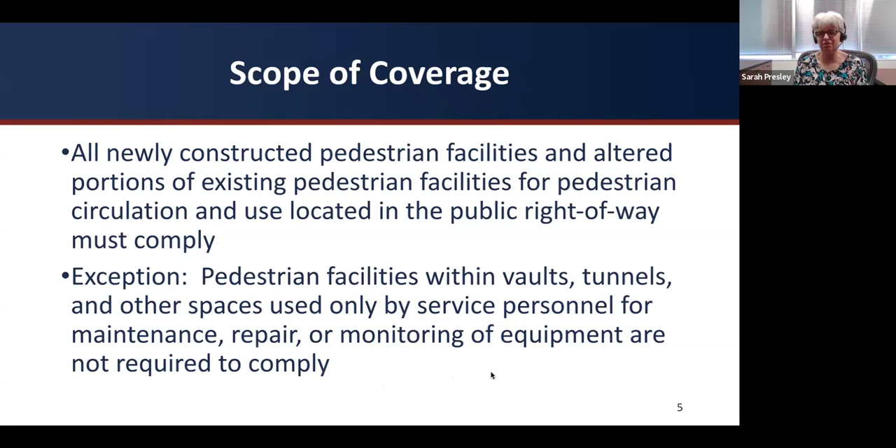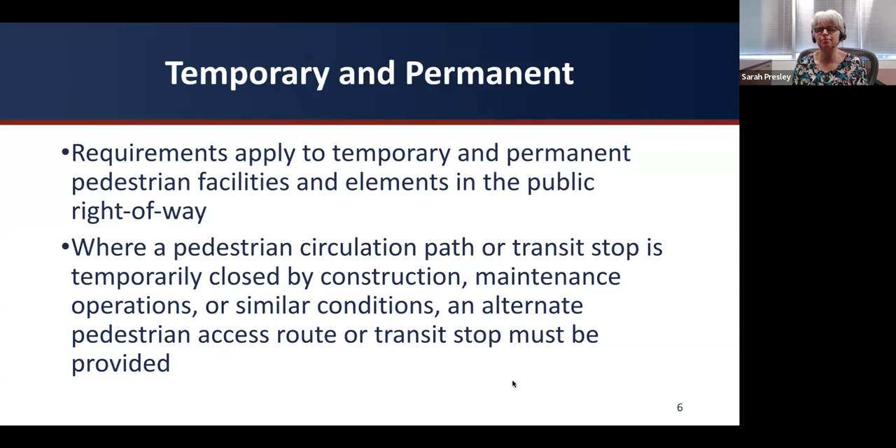Next slide. Now, these requirements do apply to permanent and temporary pedestrian facilities and elements in the public right-of-way. Some examples of coverage for temporary facilities include that where a pedestrian circulation path or a transit stop is temporarily closed by construction, maintenance operations, or similar conditions, an alternate pedestrian access route or an alternate transit stop must be provided. So those are temporary facilities, and we do have requirements in PROWAG. They're more limited requirements, but this just goes to show that we do cover temporary and permanent facilities with these guidelines. Next slide.

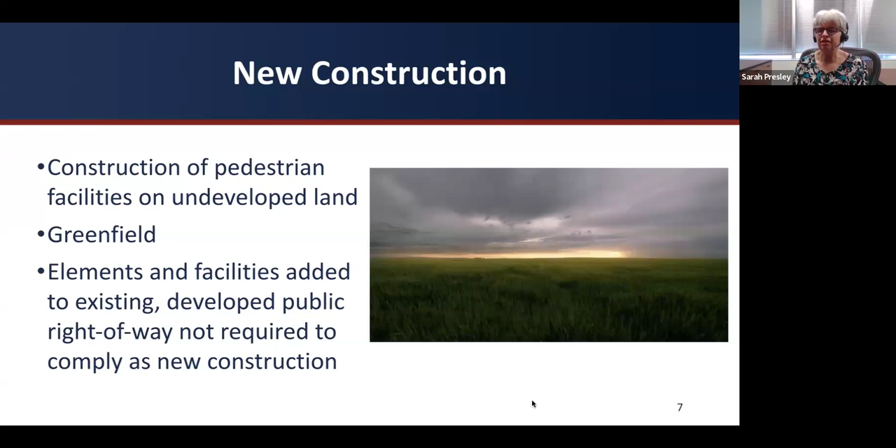And now let's talk about new construction versus alteration. So I mentioned that newly constructed and altered portions of pedestrian facilities and elements have to comply with these. So new construction is construction of pedestrian facilities on undeveloped land. It's basically what they call greenfield. So new construction is really, if you go out into a green field somewhere and there's no pedestrian facilities and you start building them, that is what's considered new construction. So elements and facilities that are added to existing developed public right-of-way are not required to comply as new construction. Next slide. On to alterations.

So first, I'll start with a couple of relevant definitions. So alteration or altered is a change to or an addition of a pedestrian facility in an existing developed public right-of-way that affects or could affect pedestrian access, circulation, or usability.

And since we talked about a developed right-of-way, we have a definition for developed. Something that's developed is something that's containing buildings, pedestrian facilities, roadways, utilities, or elements, basically things that are already existing. It's considered to be developed already, and we're talking about alterations as opposed to new construction. Next slide.

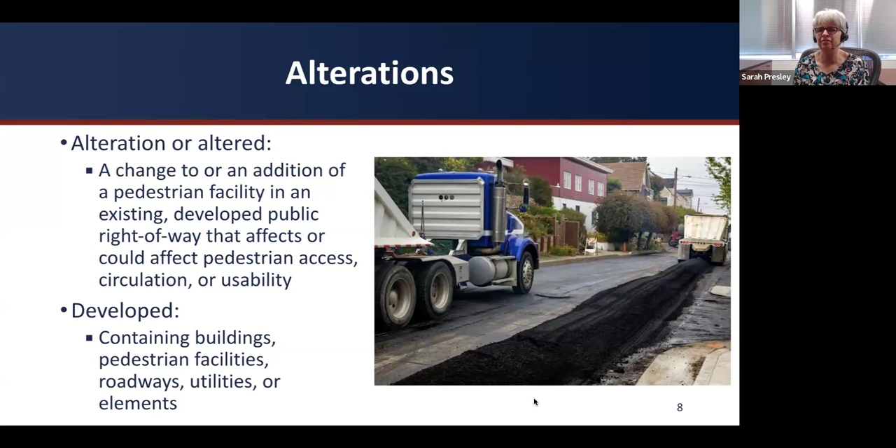Now we're going to talk about existing physical constraints. So in alterations where existing physical constraints make compliance with applicable requirements technically infeasible, compliance is required to the maximum extent feasible. So basically, with alterations, since you have things that are existing already, you may not be able to comply with the requirements fully, but you have to comply as much as possible to the maximum extent that is feasible.

And one reason you might not be able to comply fully is because you have some of these existing physical constraints. And existing physical constraints can include, but are not limited to, underlying terrain, underground structures, adjacent developed facilities, drainage, or the presence of a significant natural or historic feature. So these are all reasons why there might be an issue with complying fully with the requirements when you're altering a portion of the public right-of-way.

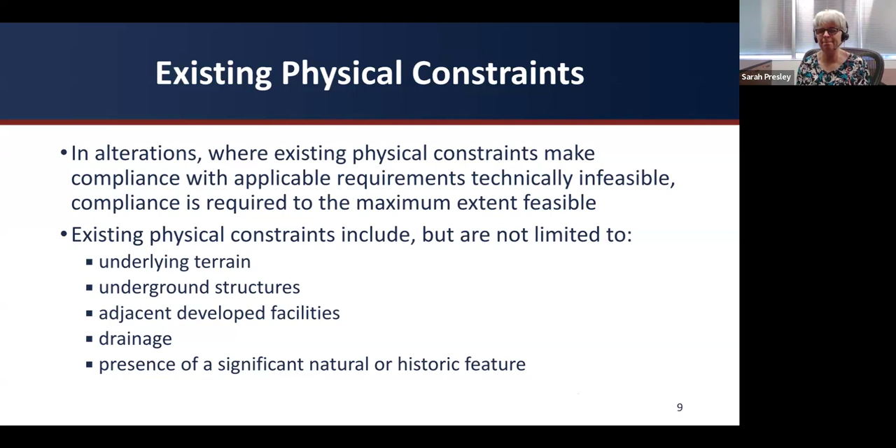Next slide. Now let's talk about alterations in connection to a pedestrian circulation path. So where pedestrian facilities are altered, they must be connected by a pedestrian access route to an existing pedestrian circulation path, and a transitional segment may be used in this connection. And of course, we have a definition for a transitional segment, and that is the portion of a pedestrian circulation path that connects adjacent surfaces with different slopes or dimensions to provide a smooth transition.

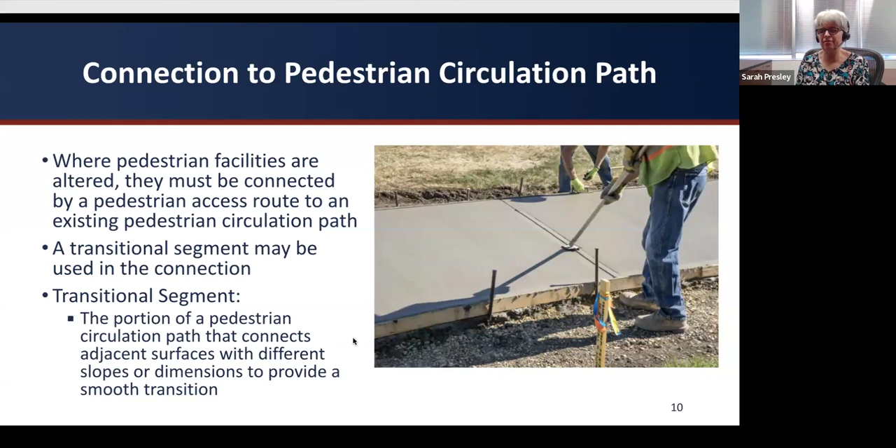So the idea here is that if you alter a portion of a sidewalk, there's obviously going to be part of the sidewalk that hasn't been altered, and there needs to be a smooth transition between the altered part and the unaltered part. So that's why you have to connect it with a pedestrian access route, basically have a transitional segment to do that.

Okay, next slide. And now we are going to move on from basic scoping to pedestrian access routes. And a pedestrian access route is the backbone of PROWAG. I'll be going over some of the basic characteristics of the pedestrian access route and also talking about some components of pedestrian access routes. PROWAG has lots of other stuff that covers parking and transit stops and some other things, but we're just going to get into the very basic part of it, which is the pedestrian access route.

Okay, next slide. So first, we will start with a definition and where the pedestrian access route is required. So the definition is an accessible, continuous, and unobstructed path of travel for use by pedestrians with disabilities within a pedestrian circulation path. And where are they required? Pedestrian access routes must be provided within pedestrian circulation paths, and these would include sidewalks and shared use paths.

And while we're on that subject, we'll define shared use path, which is a multi-use path designed primarily for use by bicyclists, pedestrians, and other authorized, motorized, and non-motorized users for transportation purposes, but may also be used for recreation. And shared use paths are physically separated from motor vehicle traffic by an open space or by barrier, and are either within the highway or some other public right of way.

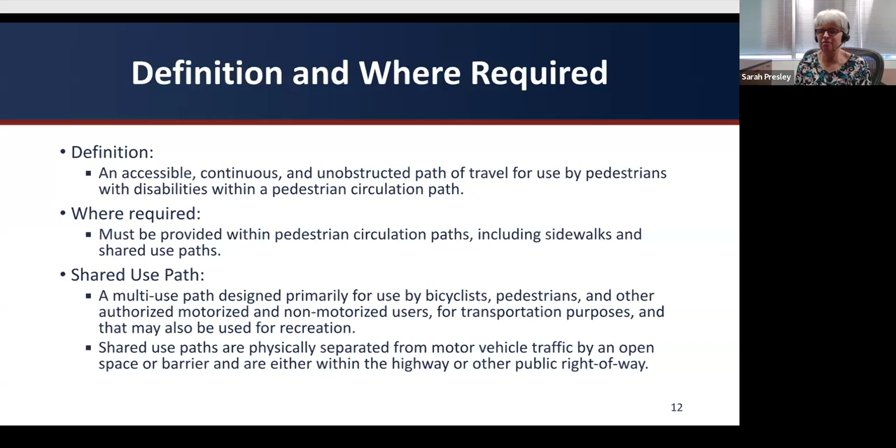And I'm just going to point out here that the PROWAG does not have as many requirements for shared use paths as people might think. I will mention a couple of them today, but there are very few, not nearly as many as people ask us questions about. Next slide.

Okay, so now I'm going to get into some of the basic characteristics or technical requirements for a pedestrian access route, and I'm going to start with continuous clear width. The route needs to be wide enough for people to use. So the basic requirement is a 48-inch minimum continuous clear width, exclusive of the width of any curb.

Now, where the pedestrian access route is less than 60 inches wide, passing spaces are required every 200 feet. And those passing spaces have to be 60 by 60. So a lot of places have gone ahead and decided to make their state or local requirements that the pedestrian access route has to be 60 inches wide, so they don't have to worry about putting in those passing spaces.

Now, within medians and pedestrian refuge islands, the clear width is 60 inches minimum, and where shared use paths cross medians and pedestrian refuge islands, the required clear width is 60 inches minimum, or at least as wide as the crosswalk which leads to that pedestrian refuge island, whichever is greater. Okay, and on shared use paths, the pedestrian access route must extend the full width of the pedestrian circulation path. So for shared use paths, the minimum clear width is the entire shared use path.

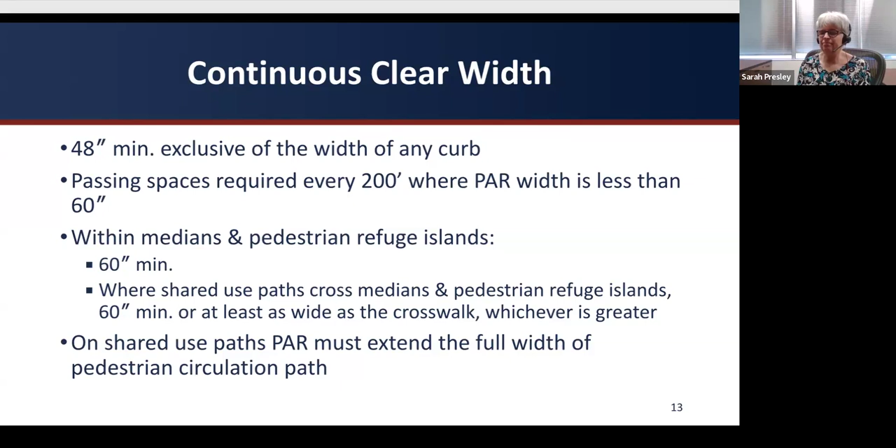Next slide. And now we want the pedestrian access route to not be too steep, so we're going to talk about grade, which is the steepness in the direction of travel. So the maximum grade of a pedestrian access route is 5%. It can have a 5% slope, except where the grade established for the adjacent street exceeds 5%, the grade of the pedestrian access route can match the grade that is established for that adjacent street.

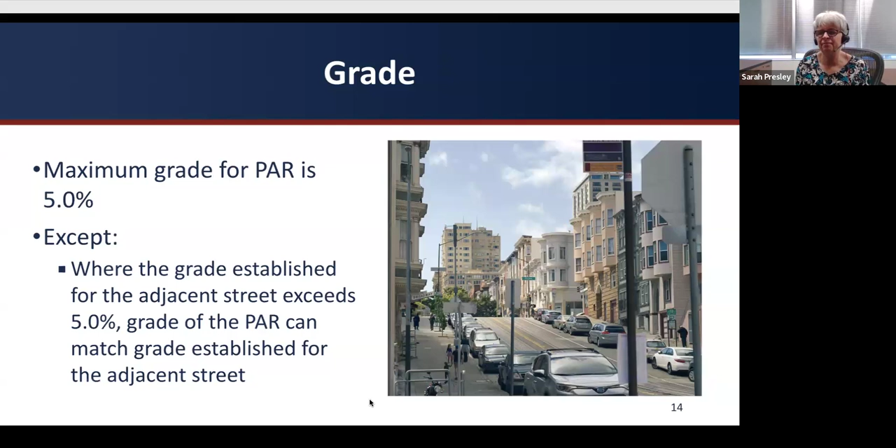Next slide. And now we'll talk about grade of the pedestrian access route within crosswalks. So the maximum grade of the pedestrian access route within a crosswalk is still supposed to be 5%, but there is an exception where roadway design requires super elevation greater than 5%. At the crosswalk, the grade of the pedestrian access route within the crosswalk may be the same as the super elevation. Next slide.

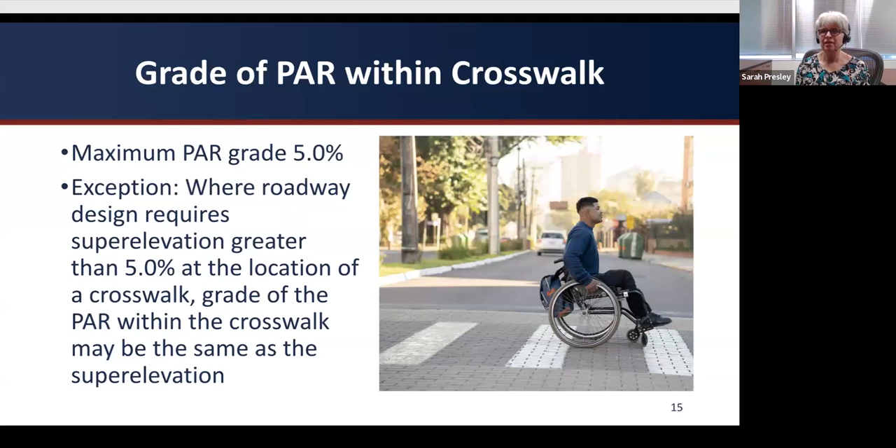And on to cross slope, which is basically the steepness of the pedestrian access route in the direction that is perpendicular to the direction of travel, which obviously you don't want your route tilting perpendicular to the direction of travel too much. So we're going to start with the cross slope of the pedestrian access route that is not within a crosswalk. So the maximum cross slope for that is 2.1%. We're trying to keep it as flat as possible, but we allow a little bit of slope for drainage.

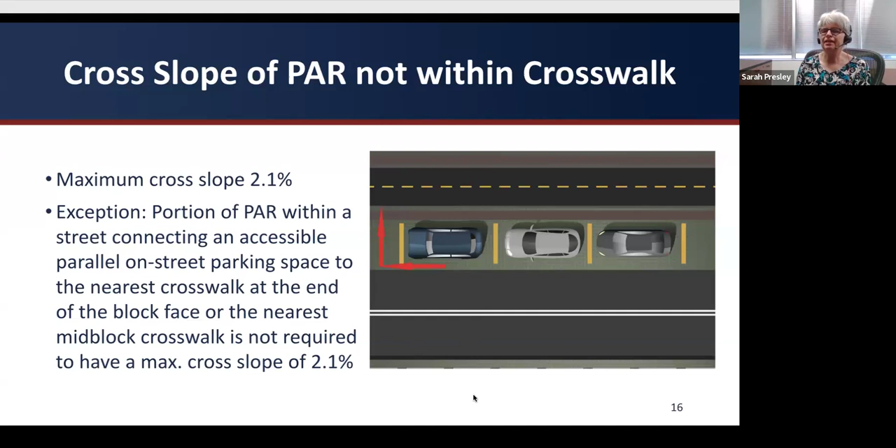But there is an exception. The portion of the pedestrian access route that is within a street that is connecting an accessible parallel on-street parking space to the nearest crosswalk is not required to have a maximum cross slope of 2.1%. And we're not going to get too much into parking today, but with the parallel parking spaces, you do have to ultimately connect them to a pedestrian access route. And in the process of doing that, to get them to the crosswalk, you don't have to meet that cross slope requirement. Next slide.

And now on to cross slope of pedestrian access route that is within crosswalk. So this depends on the type of crosswalk. For crosswalks with yield or stop control devices, the cross slope is 2.1% max, same as what's required in general for the regular pedestrian access route. Now, for a crosswalk with an uncontrolled approach, the cross slope can be as much as 5% maximum. And for a crosswalk with a traffic control signal or a pedestrian hybrid beacon, the cross slope can be as much as 5% also. And for mid-block and roundabout crosswalks, the cross slope must be no greater than the grade of the street that is going through that mid-block crosswalk.

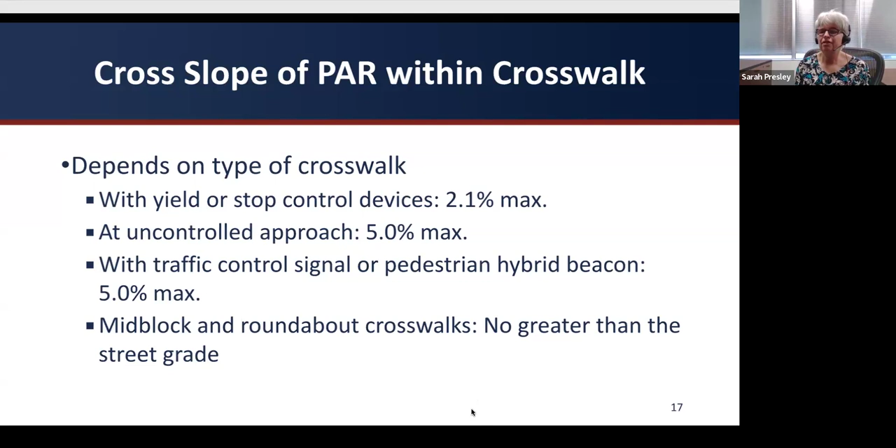Next slide. And now we're going to talk about grade breaks and changes in level. You don't want to have major abrupt changes in level in your pedestrian access route. That would make it really difficult for people using wheelchairs. So grade breaks must be flush. And for changes in level, there can be kind of abrupt changes in level up to a half an inch.

So you can have up to a half an inch of an abrupt change in level. You can have up to a 1/4 inch of an abrupt change in level that is vertical. If you're going up to a half an inch, you could have the first 1/4 of that change in level vertical. The second 1/4 of that half inch would have to be beveled with a slope no greater than 50%, or you could have the entire half inch beveled with a slope no greater than 50%.

But basically, that's the requirement. We're trying not to have any abrupt changes in level that are more than half an inch.

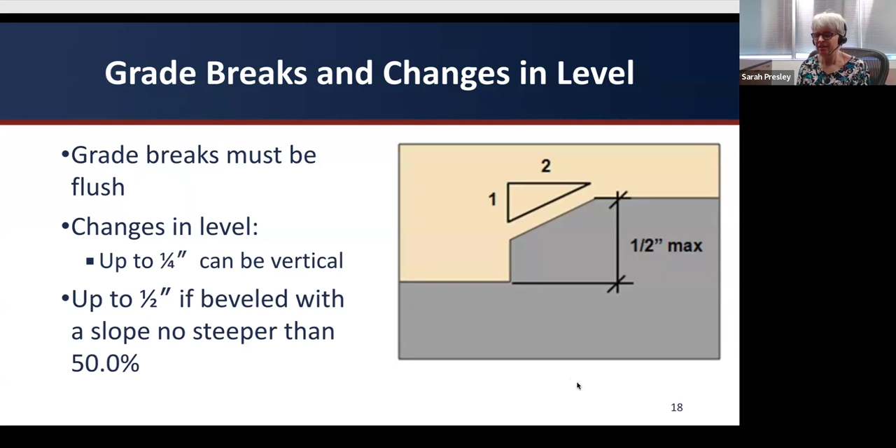Next slide. So now we're going to talk about changes in level that are in fact greater than a half an inch. So changes in level that are greater than a half an inch up to 6 inches must have a slope no greater than 8.3%. So this would be like if you had a step down on your sidewalk or something like that, and it was like 5 inches. Ultimately, they're going to have to do something to basically bridge that change in level, like a little ramp thing. And its slope can be no greater than 8.3%, and that is in fact the maximum slope for regular ramps.

And here I'm not talking about curb ramps. I'm just talking about other kinds of step downs on the pedestrian access route. So up to 6 inches, it has to have a slope no greater than 8.3%, and changes in level that are greater than 6 inches must comply with all ramp requirements. So up to 6 inches, they only have to comply with the ramp requirement of the slope. If you have a step up that's like 7 or 8 inches on your pedestrian access route, it has to comply with all ramp requirements, which would include providing handrails and edge protection.

But for sidewalks, there's a big exception for this, and we really are talking about abrupt changes in level here, because within the public right of way, your sidewalk in general can be steeper than 8.3% if the adjacent road has an established grade that's steeper than that. But I'm not going to get too much into that today. Suffice it to say that we're trying to avoid abrupt changes in level in the pedestrian access route. Next slide.

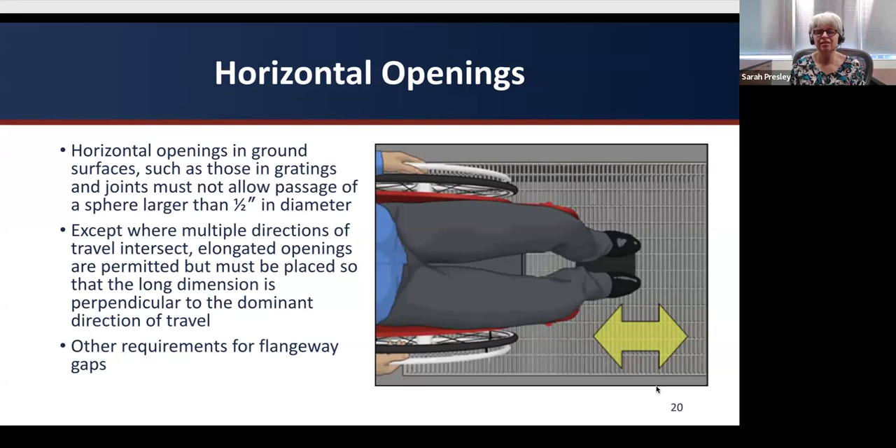Next slide. And now we're going to move on to talk about curb ramps, blended transitions, and crosswalks. And these are all definitely components of pedestrian access routes. Next slide. So first, I'm going to give some practical definitions here. PROWAG has some more complicated definitions for these, but I'm going to simplify things a bit. So first, a curb ramp is a sloped connection cut through or built up to a curb, generally with a slope that is between 5% and 8.3%,

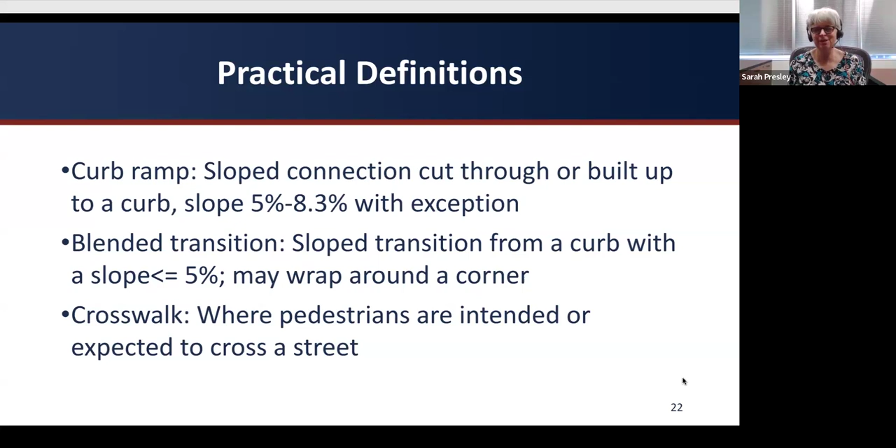though there are some exceptions. A blended transition is a sloped transition from a curb with a slope that is less than or equal to 5%, and which may wrap around a corner. And finally, a crosswalk is where pedestrians are intended or expected to cross the street. It really is as simple as that, even though we have a much more complicated definition in the PROWAG. Next slide.

Okay, now a bit about requirements for curb ramps and for blended transitions at crosswalks. So one curb ramp or blended transition must be provided for each crosswalk, or a single blended transition that spans all crosswalks at an intersection corner may be provided. Now, in alterations, a single curb ramp is permitted at the apex of the intersection corner. Now, most blind people like myself don't love this, but it's been a requirement. It's been around for a long time, and we have not gotten rid of it.

Okay. Now, at a mid-block or roundabout crosswalk, curb ramps or blended transitions must be provided on both ends of the crosswalk. Now, we do specifically say this in PROWAG, although I'm not 100% sure why, because to be sure, if you have a crosswalk, you have to have a curb ramp on both ends, regardless of whether it's a mid-block, roundabout, or just a crosswalk at a regular intersection. Next slide.

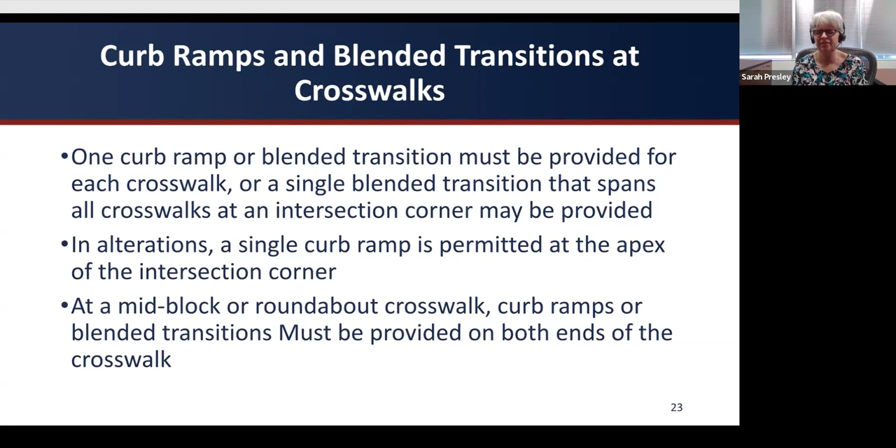Now I'm going to talk about where crossing is prohibited. So where crossing is prohibited, or where you're just not intending for people to cross, sometimes people say, well, people cross there, but we really don't intend them to cross. So do we really have to do anything?

Well, if you don't intend people to cross there, there are some things that need to be done. First of all, curb ramps must not be provided, and the pedestrian circulation path must be separated from the roadway, either with landscaping or other non-prepared surface, or by a detectable vertical edge treatment with a bottom edge that is 15 inches maximum above the pedestrian circulation path.

So this would be somebody like myself who is blind. If I'm walking along a sidewalk and I get to the end, or maybe where the sidewalk keeps going and I get to a curb, I might think that I could cross there, even if there isn't a curb ramp. But we're making it clear that crossing is not intended by having the sidewalk separated from the curb with grass or with this vertical edge treatment. So it makes it obvious that crossing is not intended.

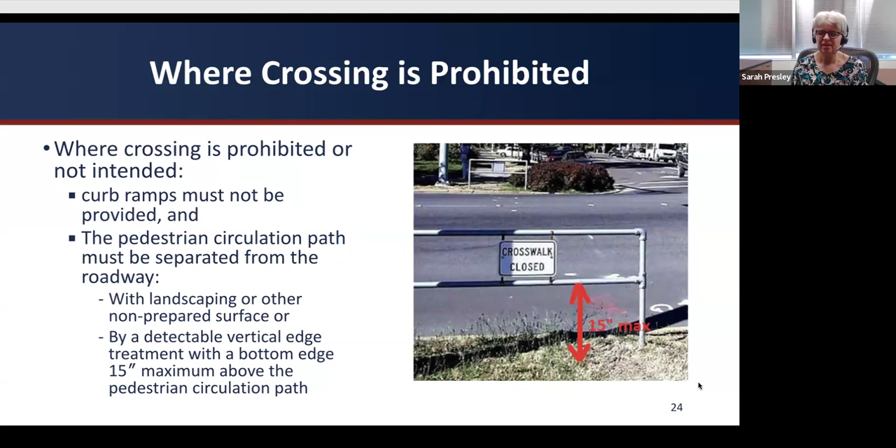Okay, now while we are on the subject of curb ramps, a few things about detectable warnings. Detectable warnings are required on blended transitions and curb ramps at crosswalks. And we have a new requirement: pedestrian circulation paths at driveways controlled with yield or stop control devices or traffic signals must have detectable warnings. This used to just be an advisory in the previous guidelines. It is now a requirement.

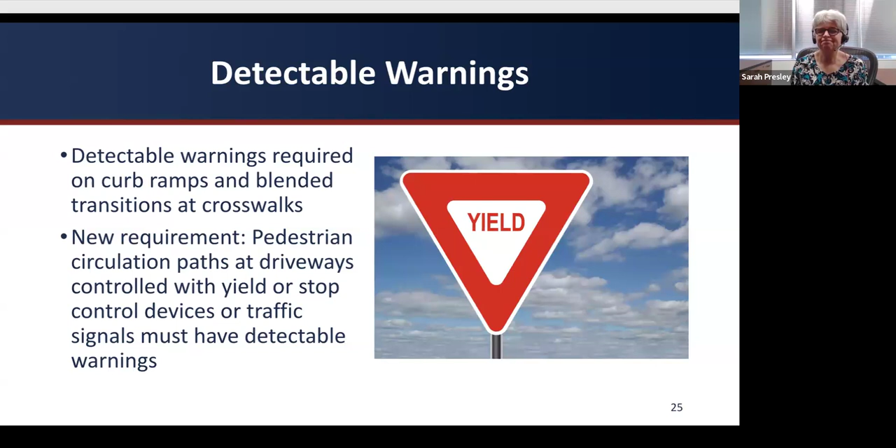Okay, now we're going to talk about detectable warnings at pedestrian refuge islands. One thing I want to say here that I neglected to put in the slide is that when you have detectable warnings, like on a curb ramp, you have to have at least 24 inches of detectable warning surface in the direction of travel.

Now, at a cut-through pedestrian refuge island, detectable warnings must be located no greater than 6 inches from the edges of the pedestrian refuge island or at the back of curb, and they must be separated by a 24-inch minimum length of surface in the direction of travel without detectable warnings.

And in order to meet this separation requirement, we needed a definition for a pedestrian refuge island. So it is a defined area that is 72 inches long minimum in the direction of travel, located between traffic lanes for pedestrian refuge within a median, a splitter island, or a channelizing island.

Now, the idea here is that if you're going to call something a pedestrian refuge island, it needs to have enough distance in the direction of travel so that you can have two sets of detectable warnings on it. So as a blind person, I start to cross the street, I go down the detectable warnings for the curb ramp, cross the street, and I get to the pedestrian refuge island and find detectable warnings there. Now, if there's only one set of detectable warnings there, when I pass those, I may think that I have gotten to the end of the street. In fact, I might think I'm done crossing the street, when I could be launching out into another side of the street beyond the pedestrian refuge island.

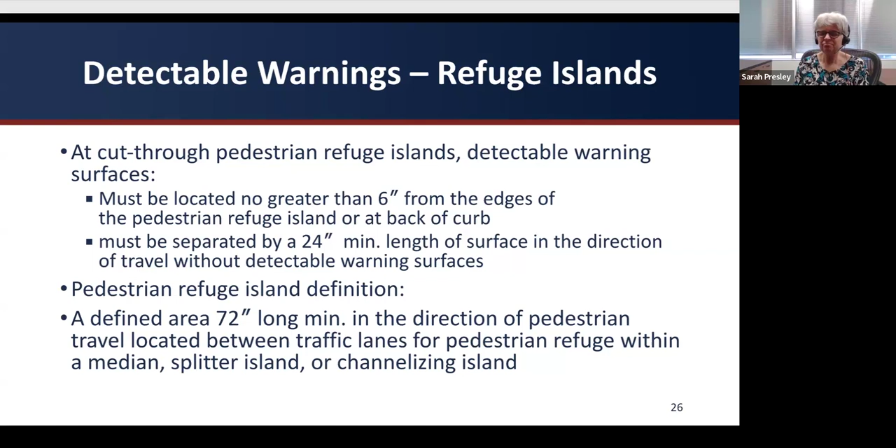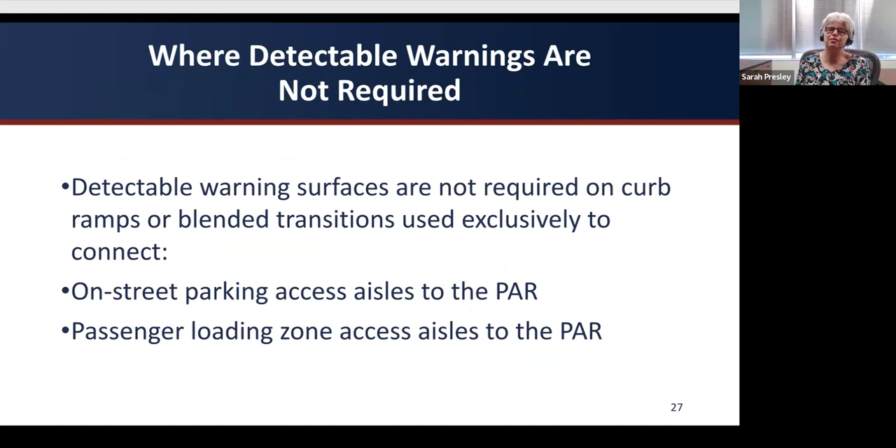Now, where detectable warnings are not required: detectable warnings are not required on curb ramps or blended transitions that are used exclusively to connect on-street parking access aisles to the pedestrian access route, or to connect passenger loading zone access aisles to the pedestrian access route. We don't require detectable warnings for every single thing that looks like a curb ramp.

A pedestrian signal head is the device containing the walking person symbol and the upraised hand symbol symbolizing don't walk, that is installed to direct pedestrian traffic at a crosswalk. Another relevant definition is the pedestrian hybrid beacon, a special type of hybrid beacon used to warn and control traffic at an unsignalized location to assist pedestrians in crossing the street at a marked crosswalk.

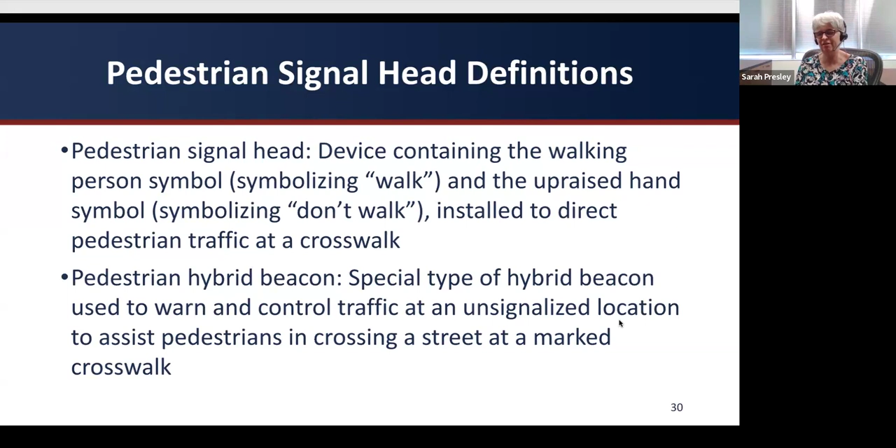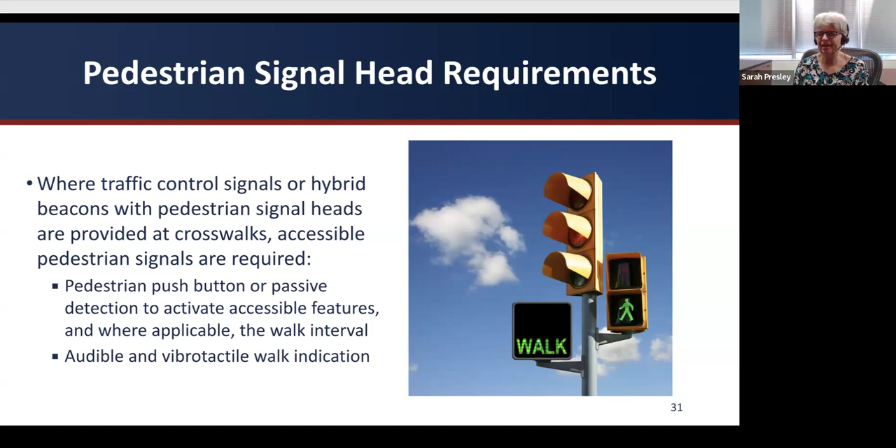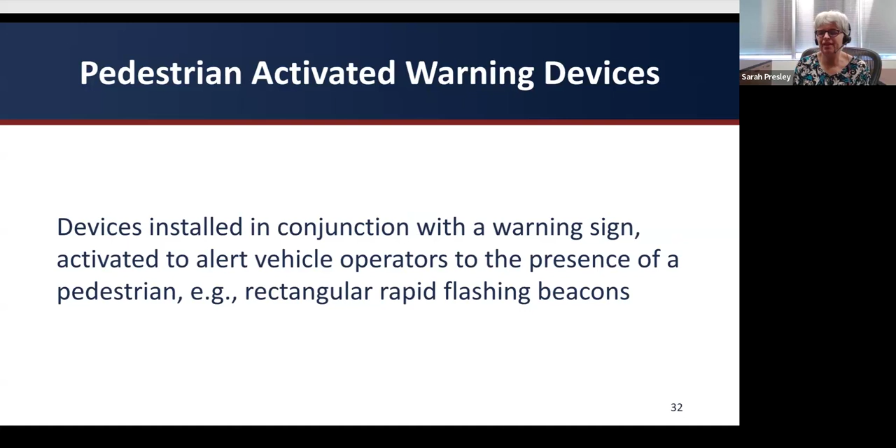The pedestrian activated warning device requirements are that where pedestrian activated warning devices are provided, accessible pedestrian signals are required that have, again, that push button or passive detection to activate the accessible features of the signal.

The main accessible feature for this type of signal is a speech message indicating the status of the beacon. This is in lieu of an audible or vibrotactile walk indication, because these pedestrian activated warning devices do not actually have a walk indication.

They're kind of warning the driver that somebody wants to cross, but as a pedestrian, I never know when, because they're never completely required to stop. So I'm supposed to get a speech message telling me the status of that beacon, and then I just have to decide when to cross and pray.